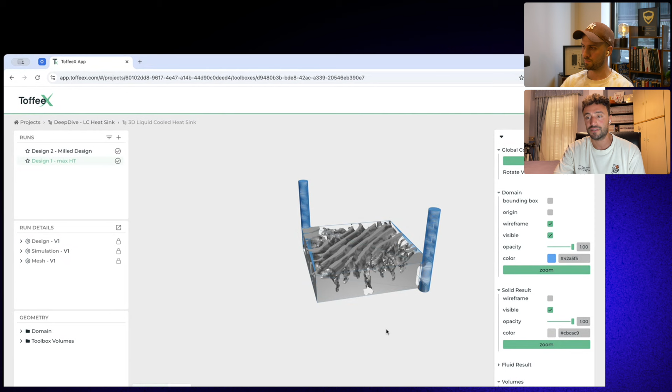So as I was saying before, the traditional design process limits the possibility that engineers can create new and more efficient designs. The traditional methods are constrained also by legacy tools and processes that limit the possibility to explore new design spaces or to innovate beyond the established norms.

This doesn't necessarily mean that the product that comes to life in the end is bad. The product at the end of the design cycle will also meet the requirements, but maybe it's not the optimal solution. It's also not the most sustainable solution in a sense. So this iterative process is what we are trying to address and to solve with ToffeeX.

That's why we are trying to propose a new way of designing, which is transforming the approach engineers will take moving forward. We don't want people to spend time doing countless iterations before they get to a design which is performing as expected. So we want them to be empowered to just make high-level decisions.

So they should be thinking, I need a component that is performing this and that. I'd like to dissipate that much of electric power, for example. I'd like the pumping power to be this low. And then it's up to the software to come up with the right solution.

So if I had to find a spot where I should place ToffeeX, it would be exactly in between a CAD and an analyst team inside the company. So we are exactly in between these two teams. We are not replacing either of them. We are just giving them more tools and more possibilities to come up with more innovative and efficient solutions.

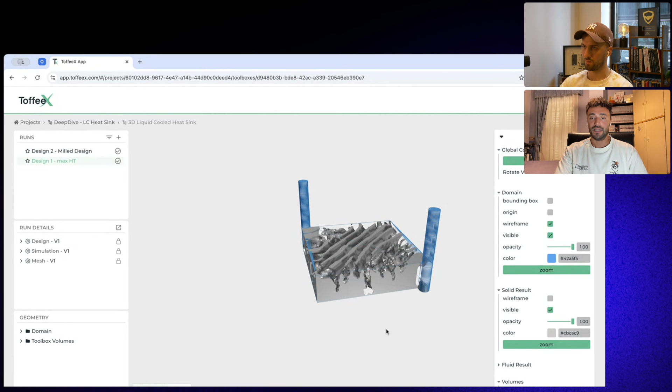I probably said a lot of words, but maybe showing that in a live demo is more efficient. So I will share the screen so I can show you a live demo of the software and guide you through a setup process, so how you would design a component using the software instead. Let me know when you can see. I think it's already live. Yeah, I can see it.

Okay, so this is our web interface. ToffeeX is a cloud-based platform. The way we define what we do at ToffeeX is physics-driven generative design. This means that we are using physics simulation combined with topology optimization to create optimized components.

We do all this in a cloud-based platform, and that's because we believe that the cloud is probably the future moving forward in engineering. So it's a good way to hand over the computational resources not to a local HPC cluster, but to something in the cloud. So more companies can adopt these tools and join the new trend of engineering design optimization.

So after logging into the platform, this is what you will find. This is our home page, which is also what we call the project page. As you can see here, we have a list of different projects. They can be thought of as folders. Fundamentally, inside each of these folders, you will find all the tools that you need to carry out a design optimization.

As you can see, I already have created a new project for this deep dive session, and I'd like to show you how to set up the optimization for a liquid cooled heatsink, which is a classic application, and it also shares a lot of commonalities with other thermal and fluid management devices. In general, when you want to start new, you simply need to click here, create a new project, give it a name, and you're good to go.

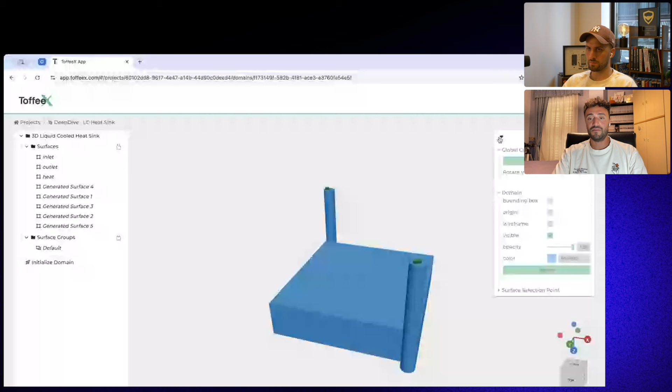The domain that we have uploaded is fundamentally a triangulated file or mesh. The input that typically needs to be provided into the software is an STL file, which can be exported out of any CAD system nowadays. Here you can see it's a very small geometry, smaller than 5 centimeters per side. So it's a very small liquid cooled heatsink to cool down a CPU.

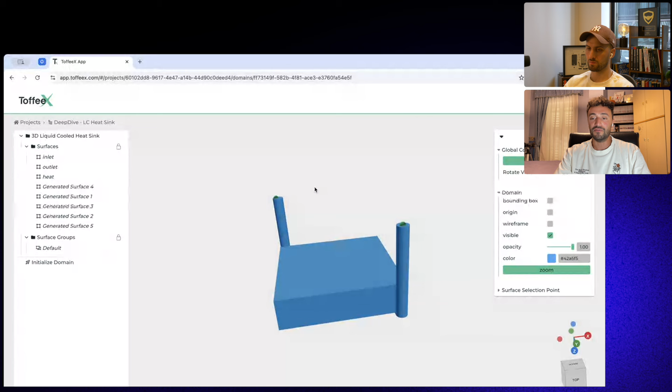What we identified here are a few basic surfaces that will be used to set up the physics simulation problem. As I was mentioning before, the software is physics driven, so we need to describe the physics to tell the software how the part is behaving, how it's performing, and to inform the optimization process to go in the right direction. In this case, we defined an inlet region that you can see highlighted here, an outlet region on the other side, and the region from which the heat is applied, in this case the power coming from a CPU.

Once we have defined our domain, we go back to our project page, and we have to build a toolbox. A toolbox is what I would define as the main operational environment within the platform. It contains all the tools that you need to perform either simulations or design optimization. To start, it's very simple. You click on create a new toolbox. You can give it a name, let's call it deep dive toolbox, for example.

And you select the domain that you want to use to run this design optimization. Here you have some physics models that you can select. In this case, we will be solving both a thermal and a fluid problem, so you select thermal fluid and click on create. I don't want to take too long, but fundamentally what you have to do is create one run, which is a design run in our case, because we are expecting the software to output a design at the end of this process.

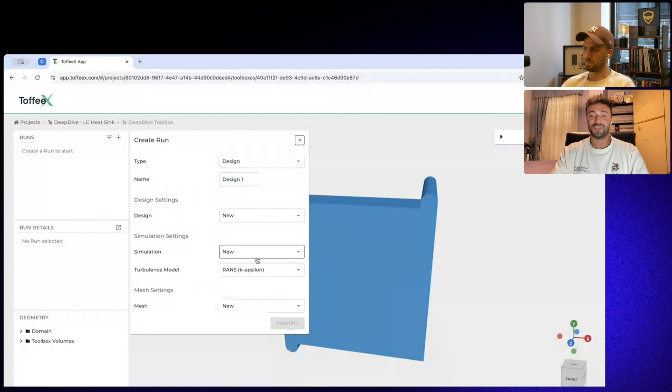We can give it a name, and we can set up settings for design, simulation, and mesh. Again, the software is simulation driven, so we need an underlying physics simulation to inform our optimization process. Once you click on create, you will see on the sidebar the option to fill in the run details, all the parameters you need to input to start the optimization process. Once everything is set up, you will be able to perform an optimization.

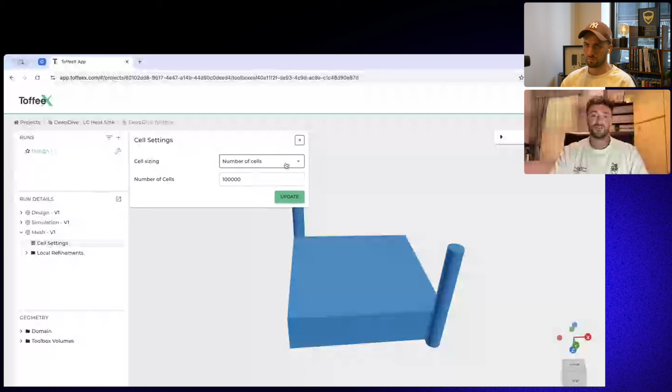So just very quickly, I would like to show you how this works. First of all, let's start with the mesh. I think it's the easiest one. Here we have to discretize our domain, so give it either a number of cells or a maximum cell size.

In this case, let's keep it to default, just to keep it with the basic settings. Under simulations is where we define our CFD. Here is where we are specifying all the conditions that describe the physics we are trying to solve. So first of all, for example, we want to tell the software what is the fluid being used in this case, so what is the coolant that we're using.

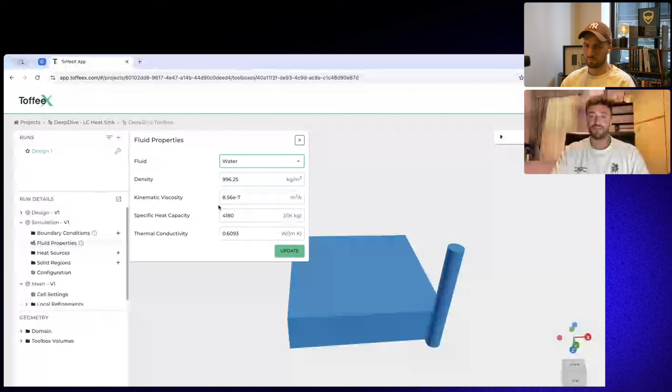As you can see, we have a list of predefined materials or predefined fluids as well. In this case, just to again speed up this setup, we will select water and click on update. For the boundary conditions, what we have to do is to define the boundaries for the problem. So of course, we want to start by defining an inlet.

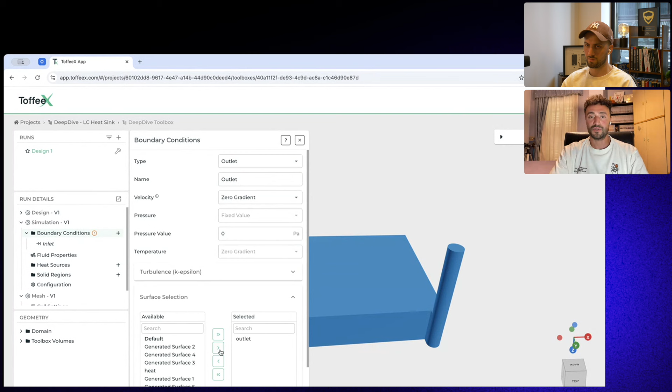Here it's very simple. So we can go define the boundary, specify what is the velocity of the fluid going inside our domain, what is the temperature of the fluid going inside the domain. And then once we have identified the patch, we can click on create. This process is what we follow also for the other boundaries. So in this case, we will define a pressure outlet. So simply identify the boundary.

Then we said that we are providing some heat, so we want to cool down this geometry. So what is the power we want to input? In this case, actually, I'm going to do something slightly different. So instead of providing a heat flux, as you can see here, you have the option to apply a heat flux, I will fix the value of the bottom surface that I identified before as heat, that you can see here, at a quite high value.

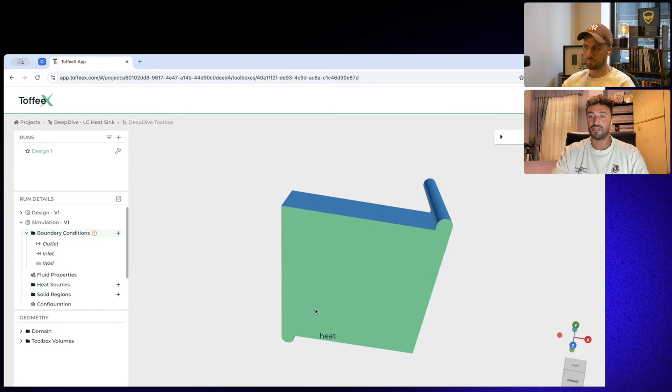The reason is that this could be, for example, let's say 340 Kelvin to symbolize the maximum temperature that the CPU can withstand. So I might be optimizing in the worst condition possible, and then I can run the validations to see also how this is behaving for different working conditions. So this is one approach that you can follow.

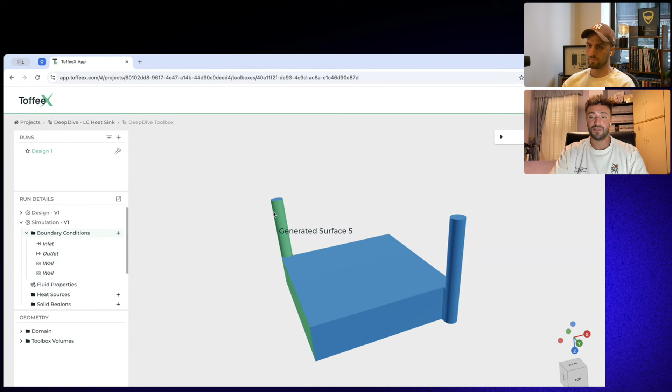The software is giving me this icon, so it's telling me that I still need to input a few more constraints, a few more boundaries. In this case, what it's asking me is to define the boundaries for the remaining surfaces of my domain. In this case, I will just use an adiabatic condition. So I'm making sure that the only heat transfer is happening between the heat provided into the system and the coolant that I've defined using the inlet here as a boundary.

Then we come to probably the most interesting part of the optimization. So here is where we define the settings for our design. As you can see, we have, again, a few parameters we have to always input for the software to successfully run a design. The first one is the material. In this case, we will be selecting a default aluminum and click on update. And then on the objective is where we define how the optimization should be carried out.

In this case, as we were mentioning, Toffee is a software to maximize the fluid and thermal efficiency of a device. So what we want to combine is something which is minimizing the pressure drops, so we want to minimize how much energy we need to pump the fluid through the system, but also at the same time to maximize the heat transfer. These two objectives are in contrast. The more you minimize pressure losses, the less you can maximize the heat transfer, and vice versa.

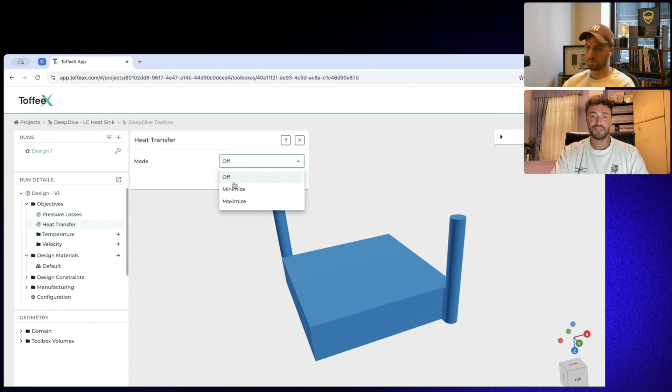So in this case, just to give a reference starting value, we will give two weights, the pressure losses and the heat transfer. So we are telling the software that we want to maximize the heat transfer. I give it a weight of 500, which is telling the software we want to give a higher priority on heat transfer in this case. This optimization is a bit more complex than this, but of course, I don't want to annoy you with a longer explanation. So in case you have more questions, please feel free to reach out after or at the end of this deep dive session.

One very interesting thing, of course, is that as we were mentioning before, Toffee started as Toffee AM, and then we transitioned to ToffeeX. So the first part of the company, Toffee AM, was clearly symbolizing a strong direction toward additive manufacturing.

So in the beginning, when we started using Toffee, the idea was to support customers or companies using additive manufacturing to exploit the freedom that could be achieved using that methodology to bring to life more efficient components. So the idea is that, okay, we have this great process, we have these great manufacturing capabilities, how can we exploit this freedom? But as we grew as a company, we realized that actually the market is moving in several different directions. So not all companies are adopting additive manufacturing.

So the idea is that we want to transition from AM to X. We want to expand it to extend our capabilities and also to open to, I would say, the unknown. So probably the X is symbolizing this as well. And we are opening now to several manufacturing processes. The idea is that we don't want people to necessarily change the way they manufacture, but it's more about adopting new tools to change the way they design. So the idea is that you have a manufacturing process. How can we optimize the output of this manufacturing process with a new software?

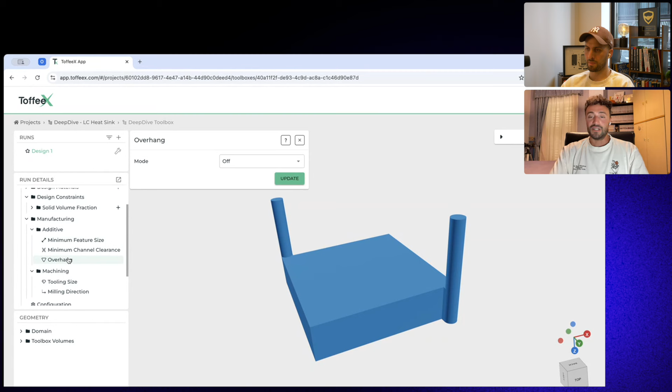So we know depowdering is something quite critical for 3D printing. And of course, overhang is probably the main thing. So we want to be able to specify a direction. So in this case, for example, we could identify a build direction going to the direction of the negative z-axis. So we could say 0, 0, -1. Identify the bottom region, which is the one that is supported. And then we could specify, for example, a minimum or a maximum overhang angle. So we know that at the end of this optimization process, the software will be not overhanging above the value we specified.

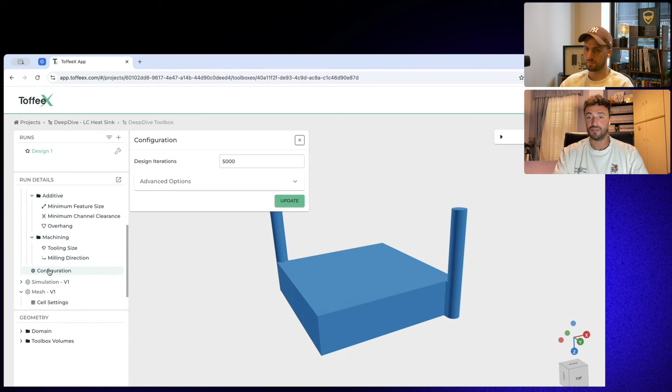On the other side, we have machining constraints. So for example, we can identify a milling direction. And in this case, again, you can provide an axis to specify how the milling will be removing material from the block of solid that you are providing. Once everything is set up, you have a few additional things you can set up into the configuration, but very simple. You go here, you click on this icon, and you can select the computational power you want to allocate for the software to run the setup and to run the optimization.

In the menu, you have here a few options, like select, for example, 8 CPUs. Again, these CPUs are not local, are not something you have to own. Everything is happening in the cloud. We are hosted on Amazon Web Services. And once you click launch, the software will give you this menu telling you that it's running outside. And then it's going through the different stages of meshing, running the first simulation to initialize the problem. And then we start a design phase. So you can also keep track and follow.

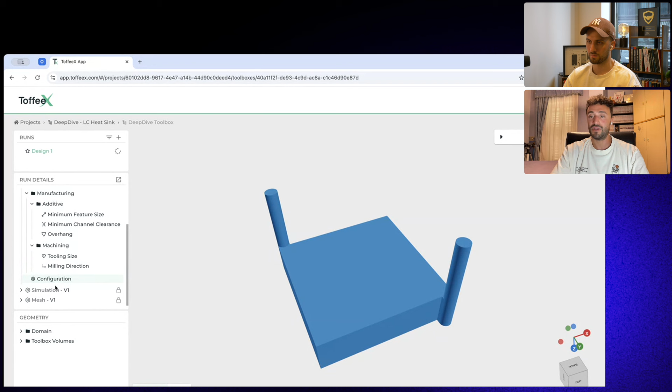Now, as you can see, it was very quick to set up an optimization. So we only had to specify and provide a design space, in this case, just the overall shape of the space we have available for the liquid cooled heatsink. We have to go through the setup of mesh, simulation and design settings. But what we are getting here as a result is a single design. Typically, what we want to do in this phase when we are exploring the possibilities we can get with ToffeeX, the best thing is to explore a variety of different settings and parameters. This is very quick and very fast to do in ToffeeX.

So, for example, here I have set up my mesh and simulation, and I'm happy with them. So I know that the simulation parameters will stay the same throughout the different design stages, and that's because these are my conditions. And I'm happy with the mesh resolution. What I want to change is, for example, the design settings.

So I want to test, what if I use a different overhang angle? What if I use a different minimum feature size? What if, instead of additive, I go for manufacturing with traditional tools, so I go with machining? What if I use less or more material? What if I use different materials? So how can we quickly explore this broader design space?

How can we, instead of making incremental improvements, start by generating a lot of designs, and then on the one that we like the most, keep on iterating just to get to a better optimum? It's very simple. What we have to do is to simply create a new run. In this case, again, a design. As you can see, the software in this case will give us the option to select and reuse pre-existing settings.

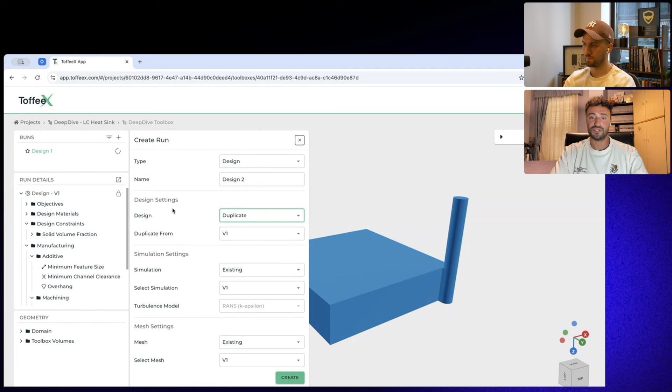In this case, we will be happy to reuse simulation and mesh settings while we want to change and duplicate design settings for the design itself. In this case, I will click on create, and the software will give me a new design. And as you can see, I won't be able to modify mesh and simulation parameters. They're fixed.

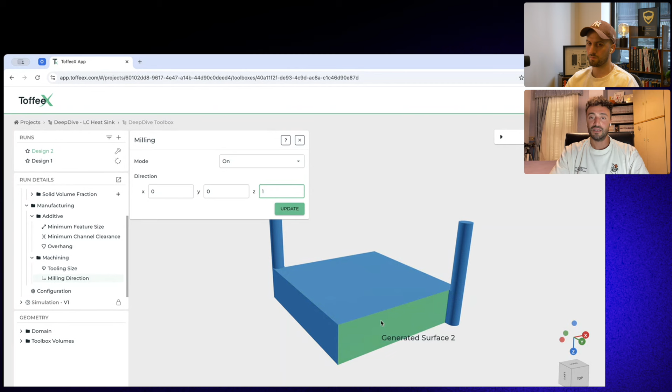So what I can do here is instead to change the output that I can get using different design parameters. In this case, for example, let's put the overhang constraint off, and let's instead enable the milling constraint. In this case, I want the software to remove material in this direction. So I have to identify the 001 axis direction, so removing material from top to bottom, and click on update. Very simple. I change one parameter. I go on the open plan icon again and click launch.

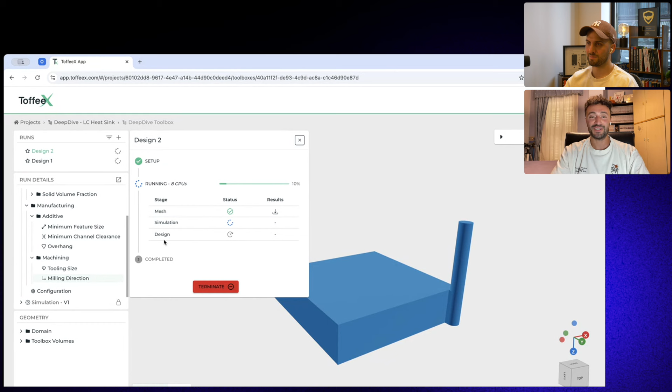So as you can see, the mesh before was completed, so the software is reusing the mesh settings. Unfortunately, the simulation wasn't done yet. Even if the software is very fast, it's not like a 3 seconds simulation. But then it's reusing the same settings to perform a new design. So here you can see how it's very quick and easy to explore a design space by quickly changing one parameter and getting to a new design solution.

Of course, I have already run some of these designs, so I want to show you the results of it. I'm probably going a bit longer on the time than expected.

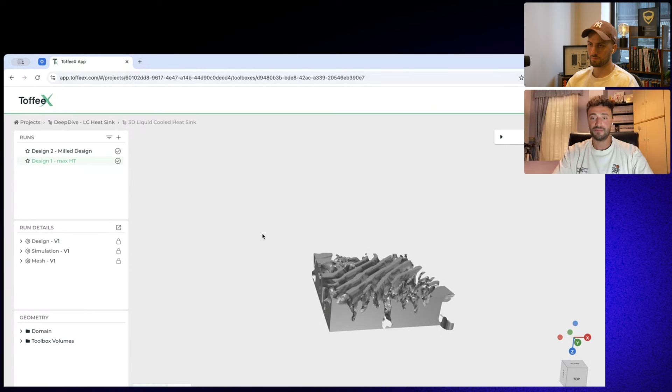But here we have 2 examples. So one is the maximization of the heat transfer without any constraints applied. So you can see this is the structure that the software is giving as an output. So this was the starting point we had, similarly to what we've done so far. If I go in wireframe, you will see that this is the internal structure the software is building, and you can also visualize the fluid region.

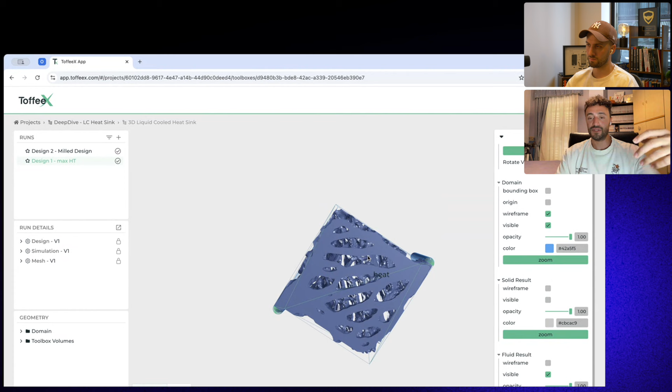So you can see how the software is splitting, let's say, the fluid coming from the inlet to the bottom of this bottom region where the heat is applied, to maximize the heat transfer and to cool down the structure as efficiently as possible. The result I'm showing you is without any constraints on manufacturing, so kind of giving 3D freedom to the software.

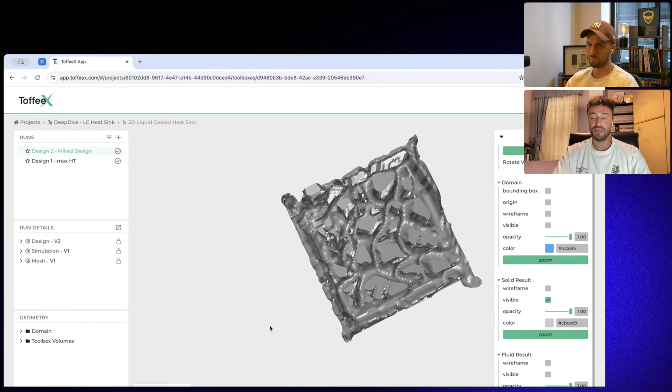But if we look instead at the design that we got by milling, we can see that for the same parameters, so same ratio of pressure losses with heat transfer, we have a completely different design. So in this case, the software is carving out material from a block of solid and giving us a result which is at this point manufacturable by milling.

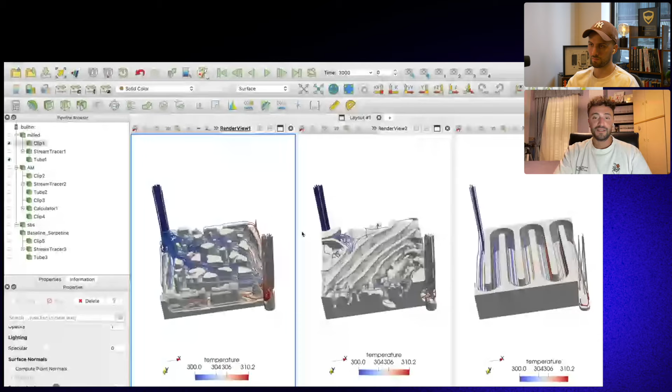I would like to very quickly share these results in ParaView, which is a post-processing tool we typically use. So I might be sharing the screen again. Here we go. So here we have a comparison of these 3 different designs. On the extreme right, we see the baseline design. So what was done previously, what we could design by just using our intuition and our ingenuity.

So in this case, a classic M-shaped channel to go down to the CPU at the bottom. In the middle, we see the structure that is being optimized with a kind of unconstrained approach, so without taking any manufacturing constraints into consideration.

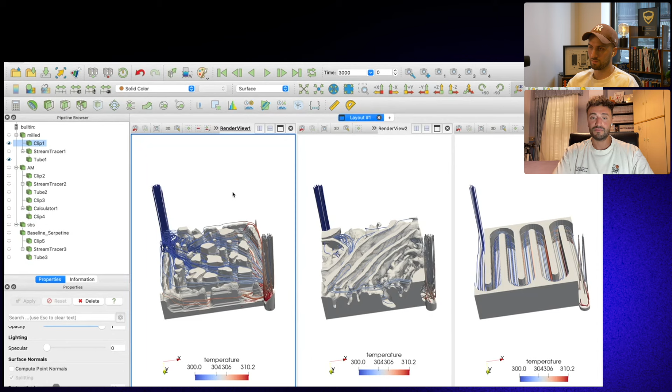And here instead, on the left-hand side, we are including the manufacturing constraints of milling. So you can see the streamlines, how the fluid is moving into the different structures. And also we can have a look at how this behaves. So if we visualize the temperature at the bottom of each of these devices, so here, for example, you can see that we have a maximum temperature of 310 Kelvin.

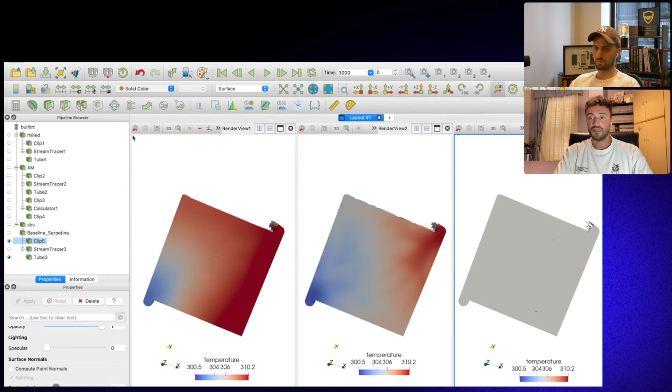If we go to the optimized region, which is slightly more unconstrained, we might be expecting a slightly lower temperature. So you can see from the legend, it's slightly lower. And if I rescale on those values, we see roughly 1 degree colder. And finally, we have the serpentine design. Again, let's plot the temperature for this one. Let's rescale, and you see 314, quite a non-uniform distribution for temperature.

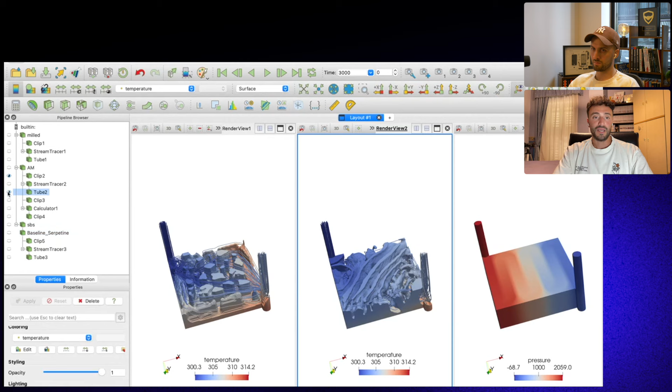So we can see how effectively the software is giving a design which is optimized, which is behaving better on the heat dissipation. But also, if we have a look at the values for pressure, we will see that we also have kind of the same pattern where, for example, for pressure, we have a value of almost 2000 Pascal. This is a small device, just to remind you. In the AM case, we have a value of lower, 243, and similar value we are expecting also for the milled geometry.

So yeah, this was a pretty quick overview, but it's showing you the difference in the designs that you can get with ToffeeX very quickly. By only changing a few parameters, you can tap into a very vast design space. So you can pick up several alternatives. So you are not limited into a design cycle which is incrementally improving on something that was either pre-existing or something that you had to come up with from scratch, and then you had to run a lot of validations to see what was working, what was not, and then slightly improve and modify until you reach a convergence to satisfy the requirements.

So this saves a lot of time. If I go back to the software, you will see this design is taking roughly 1 hour for the set of parameters we selected. So it's really quick to get to different designs, different shapes, and then based on the results you get, it's a first iteration, you can also refine until you reach a convergence where you are satisfied with all the results that you're getting at the end of the process.

And of course, this is done not anymore in months, but it's taking just a few weeks. So we have testimonials from customers going from the conceptual design to actually manufacturing the design in 2 weeks. So it's really powerful. And we believe that it is a great tool to start integrating into the design workflow.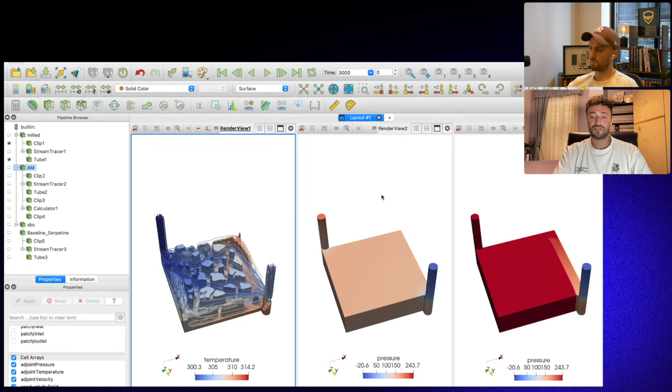Really good. So, yeah. Excellent.

So now it's time for the questions. We had one question from Ant in the comments saying, can ToffeeX provide design optimization for structural and FEA problems as well? Or is it only restricted to CFD and thermal? For now, it's restricted to CFD and thermal. So we have constraints that we can include to account, for example, for the minimum thickness of the part. So maybe you know that your design can't withstand pressure loads unless it has a minimum thickness. That's something we can control.

However, we are not performing structural optimization. The main reason is that we believe our product is quite unique in what we do, and this is our main selling point and our main strength. There are so many players in the market doing structural optimization, and there is no reason to compete with them. In our vision, the reason why we will start implementing structural topology optimization is when we start looking at fluid structure interaction, to give a more complete optimization. But at this time, we are offering only fluid and thermal optimization.

Mm-hmm. I think that makes sense. Also a strong positioning from your side to try not to be a jack of all trades, which is good.